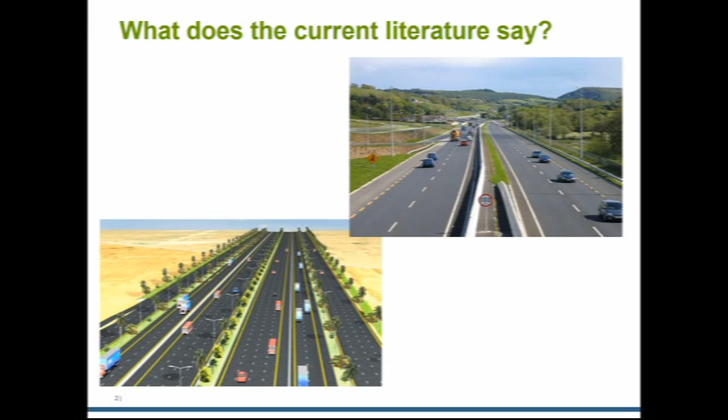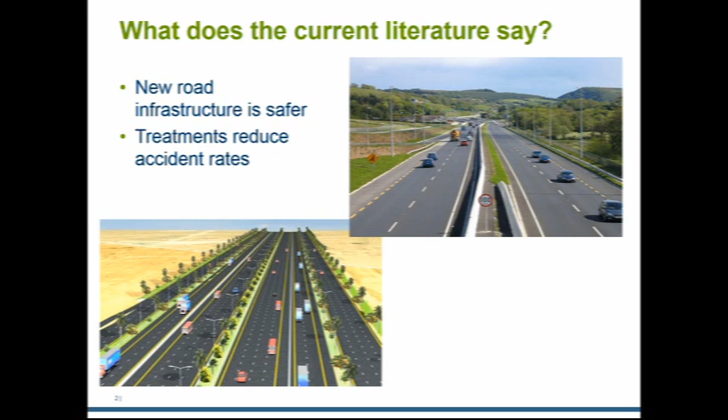So what does the current literature tell us about new infrastructure? So if it's a new road, it's going to be safer than an old road. And that's simply because they install treatments such as, they could have better alignment, you've got wider shoulders, or you could have barriers and so on. And if it's upgraded from 2 lanes to 4 lanes, then you've got dual carriageways, which will reduce the chances of head-on collisions.

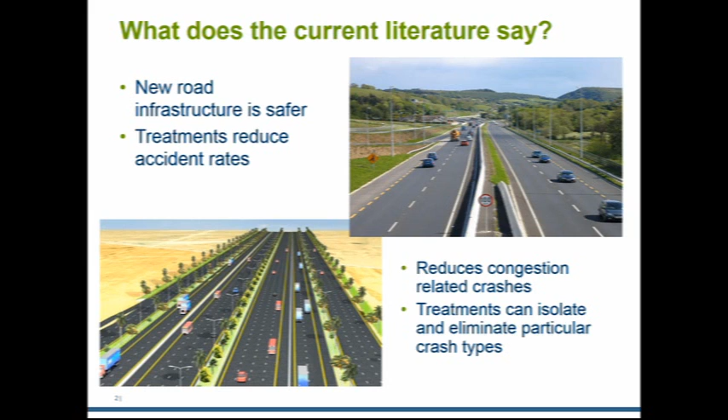Also as well, if there's congestion problems, you may have congestion-related crashes, which could involve potentially frustrated drivers and road rage. Also, start-stop, you're going to have rear-end accidents. And also new treatments in place can isolate particular accident types. So if there's one accident type that's very prominent, you can put in a treatment in place that deals with that particular accident, therefore making the road safer.

What existing literature also tells us is that new infrastructure improves operating speed. Again, with the extra capacity on that, vehicles don't have to travel at 30-40 kilometers per hour, for example, if you're getting congested. You could go back up to the speed limits of maybe 100 and 110 kilometers per hour. Literature also tells us that more fatalities occur at higher speeds. And if you look at the literature, that is actually quite obvious.

And if you look at the United States, reduction of speed limits has actually reduced fatal accidents by 16.4%. I think that was reduced from 70 miles per hour down to 50 miles per hour. Current literature was also generally focused more around the speed limits and how that affects safety rather than operating speed. And today's paper, we're going to be focusing a little bit more on operating speed than speed limits.

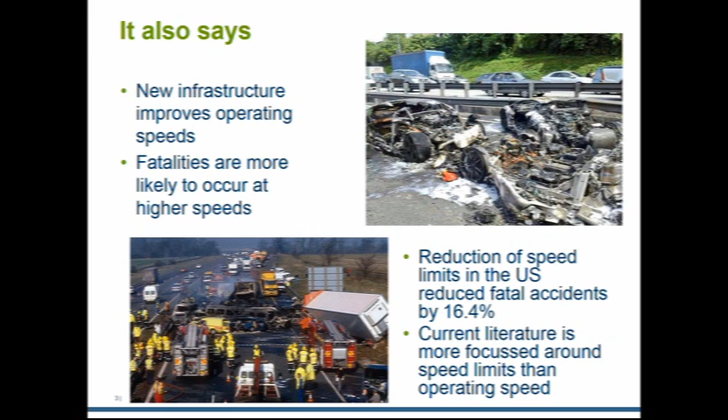So how are we going to establish a relationship between operating speed and safety? So what's been done is we've looked at particular sections of the Queensland network that offers us a range of speeds. And again, a lot of that is within southeast Queensland. So as you can see in the table here are the selected motorways and sections. Pacific Motorway all the way down to the border, got 79 kilometers there. Got the Bruce Highway, Brisbane to Maryborough, 225 kilometers.

Sunshine Motorway, again about another 8.6 kilometers there. Gold Coast Highway, Helensvale to Coolangatta, 29.8 kilometers. Gateway Arterial Road, 11.3 kilometers. Warrego Highway, Ipswich to Toowoomba, about another 95 kilometers. And the Western Arterial Road, Ellen Grove to Jindalee. So this was data that we've collected over about 2 or 3 years in order to have a large enough data set to establish a relationship between operating speed and fatal accidents.

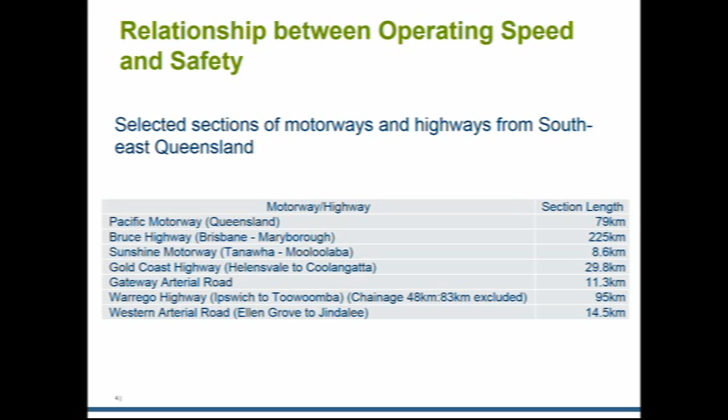So operating speeds weren't actually available in the data. They had again the speed limits, they had the capacity of the road, how many lanes in each section, and the traffic volumes, the daily traffic volumes. So in order to make a comparison between safety and operating speed, we had to calculate the operating speed based on the capacity of the road and the volume of traffic.

So you can see here the graph. This is a relationship between volume capacity ratio and operating speed for motorways. 4 lane, 6 lane, 8 lane uses this graph here. So volume capacity ratio of below 0.4, we would assume vehicles are traveling at the speed limit of 100 kilometers per hour. Between 0.4 and 1, we would calculate the speed somewhere between 70 and 100 kilometers per hour. And then for a volume capacity ratio of between 1 and 1.25, we'd calculate the speed to be between 30 and 70 kilometers per hour.

And then once we've got that average speed for each section, we'll then go and look at the number of accidents, how many fatal accidents, serious injury and property damage there is, and determine actually how safe those roads are for those particular speeds.

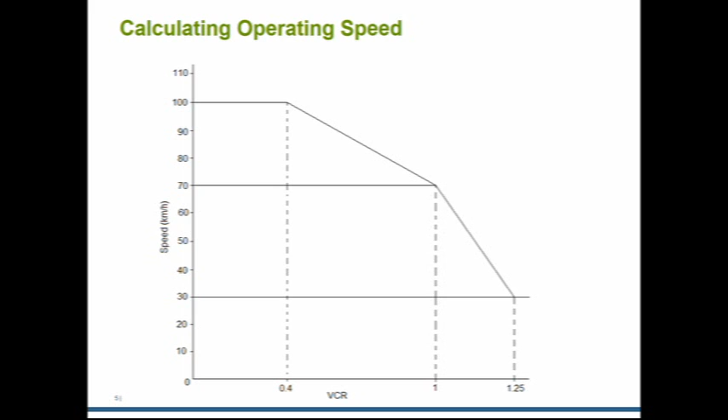So here are the results of the analysis that we conducted. So if we have a look at operating speeds below 70 kilometers per hour, we didn't actually collect any fatal accidents on those sections of roads, but more than half of the incidents actually were minor injuries, and we had about a quarter that were property damage. In fact, for that speed, that's the highest percentage out of all the speed categories we looked at for minor injuries.

If we look at 70 to 80 kilometers per hour, I think we would have had a few fatalities. Again, less than 1% of accidents were actually fatal accidents, and numbers were quite similar to what we're getting for less than 70 kilometers per hour. If we go up to 80 to 90 kilometers per hour, we see there's a bit of a jump now, actually getting more than 1% fatal accidents. And we're seeing that there's also an increase in the number of hospitalizations, whereas minor injuries percentage-wise are actually a little bit lower.

If we go from 90 kilometers per hour to 100 kilometers per hour, again, fatalities have gone up, now almost at 2%. Hospitalization, again, has gone up a little bit, and minor injuries are now down to just about 36% of all accidents. And once we get over 100 kilometers per hour, fatalities are actually up there almost at about 3.5%. Hospitalization has also increased. That's around, I think it was around 28 to

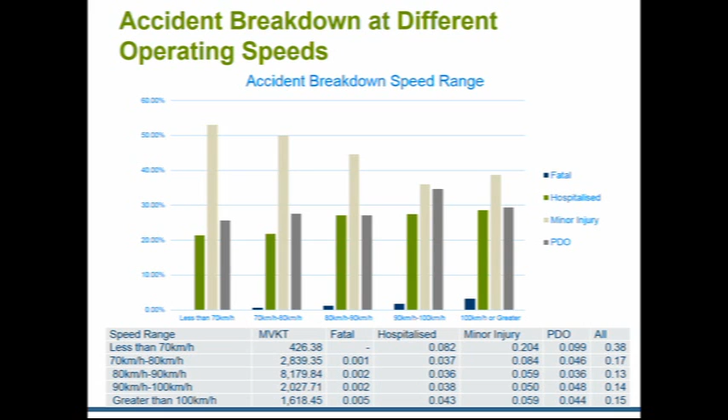29%. And minor injuries have remained fairly constant, and property damage, again, it seems to be fairly constant across all the speed groups. But it seems like there's a clear inclination for more fatal accidents to occur once speeds seem to get over 90 and especially over 100 kilometers per hour.

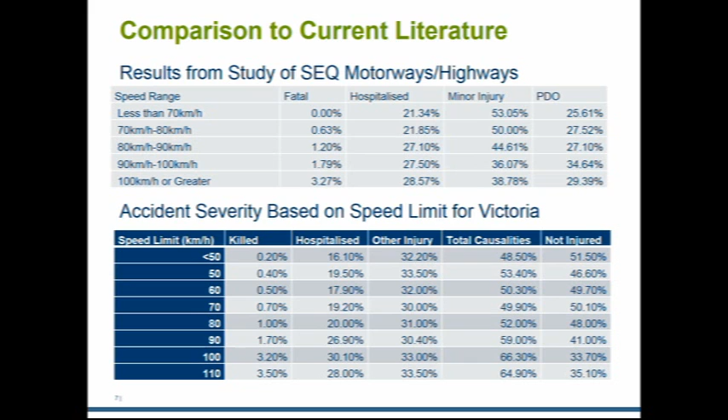So how do you put a value on safety? In transport, there seems to be basically two schools of thought. One is the human capital approach, and the other is the willingness to pay approach. Human capital approach basically looks at the cost of an injury or fatality in terms of income foregone, the cost it is to family in terms of disturbance of that nature, or you could be looking at hospital costs, costs and delays to the transport network of having to close a road down temporarily, and along those lines, something that you can put a dollar value on based on outcomes of certain events.

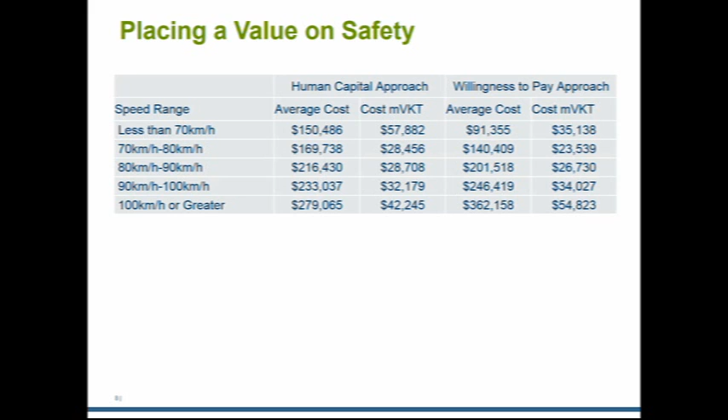The willingness to pay approach is a little bit more difficult, and there's a number of ways of going about that. You can use stated preference surveys. In a sense, you can be asking people how much value they put on their life, and that could be shown through a number of questions. Like, for example, would you take a more dangerous road that saves you 10 minutes compared to a road that's a lot safer? And you look at that in terms of their behavior to determine their approach to risk.

So where the two differ in terms of values is we've got the willingness to pay approach, which came at a statistical value of life of about 7.5 million in 2013 prices, whereas you've got the human capital approach, determined by Austroads, which is considerably lower at around $2.6 million per human life. The other types, hospitalization and minor injuries and stuff like that, the values came out to be quite similar. So it's really the loss of life being the biggest difference between these two approaches.

So we'll take a look at our speeds and what is the average cost based on the higher fatalities. So again, we've calculated it as an average based on the nature of accidents we showed previously. So using the human capital approach, the average cost is going to be about $150,000.

And if you're traveling at over 100 kilometers per hour, the average cost is going to be around $280,000. So it's almost double the amount. If we take a look at the willingness to pay approach, though, the cost of a crash below 70 kilometers per hour is under 100,000, so it's actually a little bit lower. But in terms of the cost of a crash above 100 kilometers per hour, because of the fatalities and because of the loss of life, that comes in at 362,000, which is almost 4 times the amount of the value of a crash that is under 70 kilometers per hour.

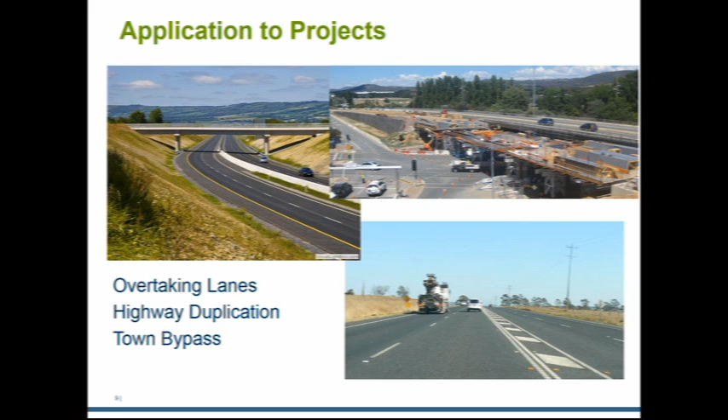Okay, let's start with the overtaking lane. So what does an overtaking lane do? So if we start off with 2 lanes, you add the overtaking lane, that's going to give us 3 lanes, and that allows for safe overtaking. So now vehicles don't have to overtake into oncoming traffic. It should improve operating speed, because again, there's going to be more opportunities to overtake. So vehicles will be moving faster and they should be moving safer.

So how do we actually calculate accidents with that? So a typical approach is we look at the actual section where the overtaking lane is. And Austroads has produced numbers such as 25% reduction in accidents for the length of the overtaking lane. So an overtaking lane could be 1 kilometer, for example. That 1 kilometer should experience 25% reduction in accidents. We look at also what we've got in an upstream area. So that's the 3 kilometers prior to the overtaking lane.

So what's been assumed here is that vehicles are going to be less likely to risk dangerous overtaking if they know there's an overtaking lane ahead where they can overtake safely. So again, you get that added safety. Again, it's only a 2.5% reduction. And then after the overtaking lane, there's been an assumed 2.5% reduction for that 5 kilometers. That's assuming that vehicles have overtaken the slower vehicles and they don't need to overtake another vehicle for a while. So again, it's making the assumption that you've got a stretch of road where overtaking isn't required, therefore it's going to be safer. And it's only a 2.5% reduction.

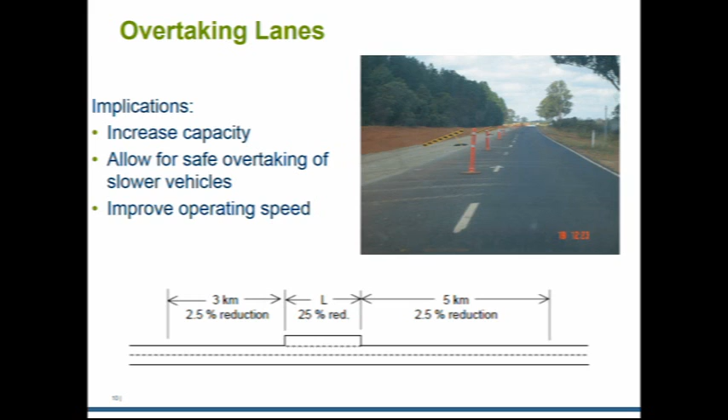So a number of key assumptions had to be made. So we made the assumption that the average speed improves from 70 kilometers per hour to 100 kilometers per hour. The number of vehicles, the average annual daily traffic, is 8,000. So we calculated it in our spreadsheet model, using the human capital values and also the willingness to pay values. So using the human capital approach, we came up with accident savings of just over 1 million, and using the willingness to pay approach, we came up with accident savings of around 480,000.

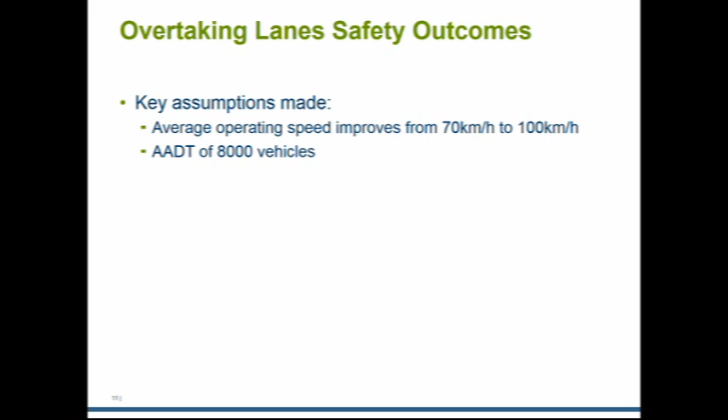So again, both results indicate that overtaking lanes are actually improving safety, even though operating speed has increased, simply because of those reductions in accident rate, because of the extra lane where vehicles won't have to overtake into oncoming traffic. Again, the willingness to pay approach gives you less benefit simply because of fatalities being so high and the higher speed potentially causing more fatalities than at the lower speed. But overall, the overtaking lane, even if you're going from 70 kilometers to 100 kilometers per hour, produces accident savings.

The next project we looked at was a highway duplication. So we went from 2 lanes to 4 lanes. So what is this? It's an increase in capacity. And by going to a dual carriageway instead of the single carriageway, there will be a reduction in head-on collisions. And of course, because of the increase in capacity, we'll see improved operating speeds.

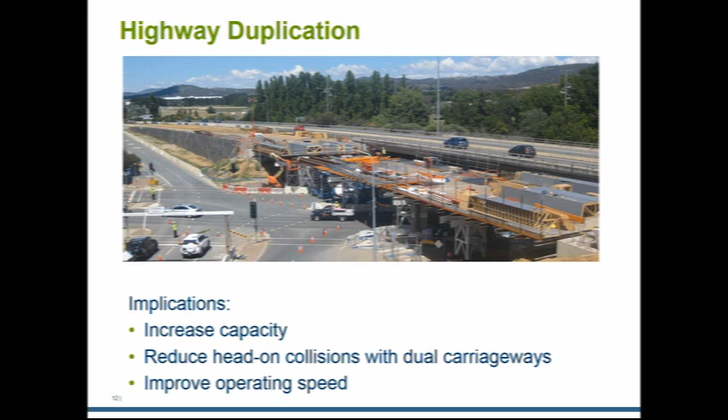So with the highway duplication, we made a number of assumptions. So we've assumed that the average annual daily traffic is 25,000 vehicles. Again, like with the overtaking lane, we've assumed that operating speed improves from 70 kilometers per hour to 100 kilometers per hour. So we've got a 2-lane average seal of 10 meters to a 4-lane dual carriageway. I had to state the seal width because, again, depending on the seal width, it has an impact on the accident rate. So this is a reasonably narrow seal compared to some of the wider 2-lane seals.

We're using accident cost reduction based on the model road state, as mentioned. So the results indicate, with the human capital approach, again, we have some savings, just under $1 million worth of accident savings. Again, that kind of makes sense in the sense that head-on collisions have been eliminated. The willingness to pay approach actually gives us negative savings, which is actually quite interesting.

So it appears that even though we've got a reduction in crashes from reduced head-on collisions, potentially fatal, because of the higher speeds, 100 kilometers per hour, there are actually still going to be more fatalities, and that high cost per fatality in the project case results in negative net accident cost savings.

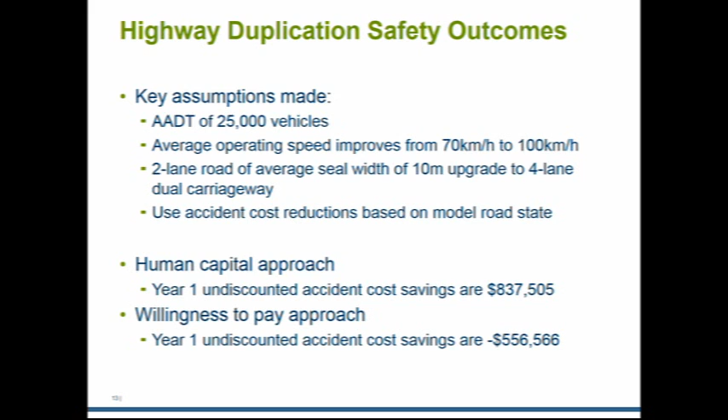Next project that we considered is a town bypass. So the new road is bypassing a small urban area. So what happens there is you're avoiding intersections within that urban area. So you're avoiding start-stop collisions and accidents, which normally intersections have a number of. Though normally there's not that many fatalities at intersections because of the lower speeds. And also now because we've got this bypass, you would expect to see quite an improvement in operating speed, in the sense that you don't have to go through a potentially congested urban area with intersections, etc.

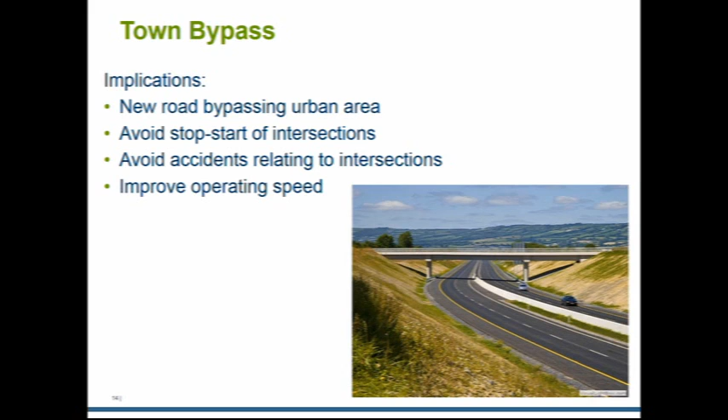So for this town bypass, a number of assumptions were made. So we've assumed that 3 intersections are bypassed, that there's an annual average daily traffic of 20,000 vehicles using the existing road. After the bypass is built, we've assumed that 10,000 vehicles now bypass the existing roads. So because we now got 2 roads, the average operating speed again improves from 70 kilometers per hour to 100 kilometers per hour, consistent with our other projects.

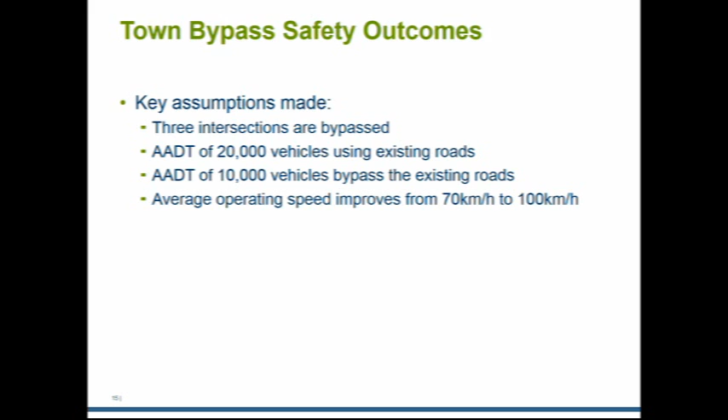So what do we get? A human capital approach again produces accident savings of almost $1 million, but the willingness to pay approach again produces negative accident savings. Again, it's the same thing. It's the higher speeds that are producing those extra fatal accidents, even though the number of accidents is probably greatly reduced. But those relating to intersections and stuff like that generally don't tend to be fatal.

But once a bypass has been built, moving at speeds of 100 kilometers per hour, based on our numbers that we showed earlier, is producing those high accident costs in the project case. So again, if we're using the willingness to pay approach, this project is actually causing a higher cost for accidents than if we hadn't gone ahead with the bypass.

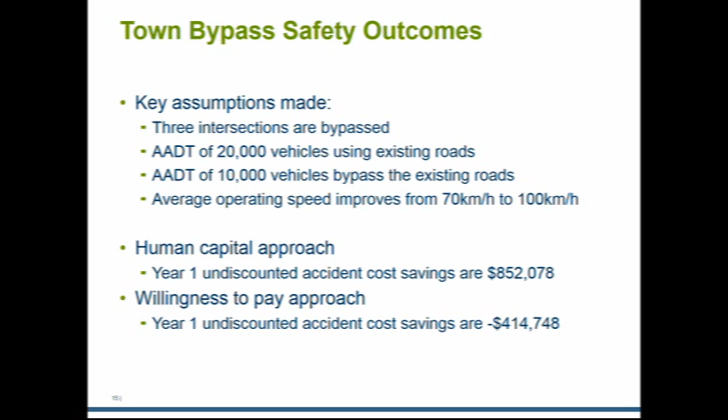The approach adopted here for the examples is a little bit different than the typical approach that's used in cost-benefit analysis. Typically, we'd look at an accident rate for your base and your project case, and then we'd use an average accident cost across the board, which includes all the accident types. So here we've actually looked at accident costs per accident type. So we've got the fatal accidents, which is higher, etc. So that's a recommended use, that we actually focus more on the different types of accidents that we get at different speeds, rather than just using a flat average.

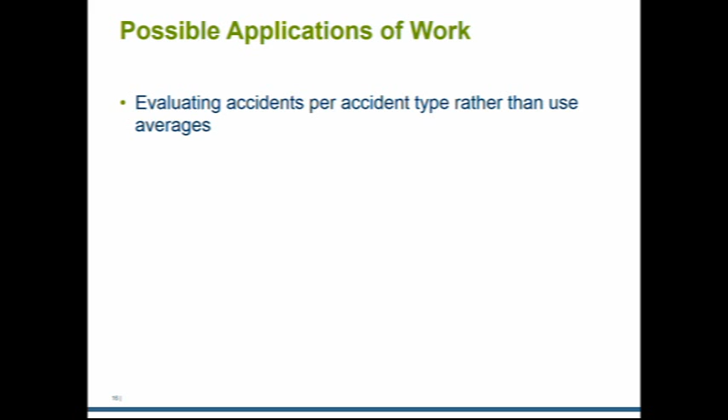What we've also found is what we're calling here the magic 90 kilometers per hour. It appears that once 90 kilometers per hour has been hit, roads become considerably more dangerous, in the sense that accidents above that speed are far more likely to be fatal, and that's consistent with what we've produced here, and also other literature, like in the US, where we went from 70 miles per hour down to 55 miles per hour.

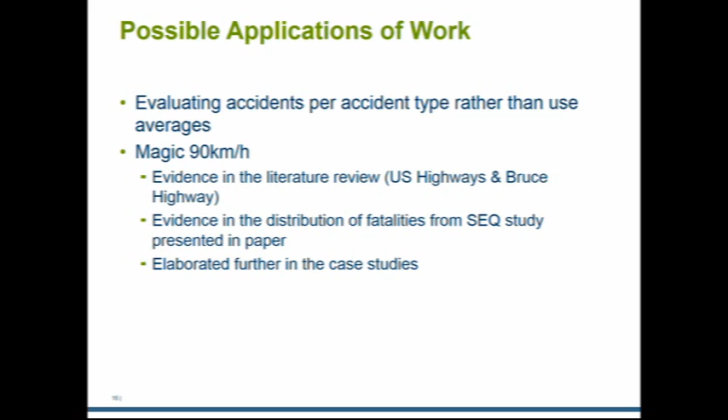Again, great reductions in fatalities. The Bruce Highway, it went down from, I think it was 100 down to 90 kilometers per hour. I think that was up to the Cooroy to Curra sections. Again, we noticed the same thing, a great reduction in the number of fatalities.

Another approach is to actually use DCA codes, or road user movements. And again, that is a far more detailed look at accidents. You're actually breaking it down for a particular type of accident. Is this a head-on collision, which has a much higher cost because there's a much higher chance of fatality than if it's a rear-end accident, which almost never produces fatal accidents, but you could have injuries and property damage. Again, that will give us a more detailed perspective when we're trying to evaluate accidents for a cost-benefit analysis.

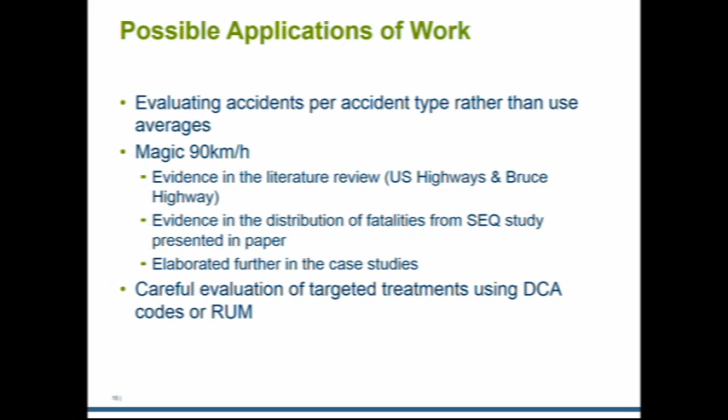So in conclusion, I'd just like to summarize the key findings of this paper. So we're looking at higher speed. Generally at a higher speed, you're more likely to have a fatal accident than if you're traveling at a much lower speed. But lower speeds that are caused through congestion will give you a higher accident rate, and you'll get more accidents relating to start-stop and things like that. So lower speeds, more accidents, but at higher speeds you're going to have more fatal accidents and potentially far more costly accidents.

And also, looking at the different types of projects, overtaking lanes, which generally deal with both safety and improving capacity and operating speed, both from a human capital and also the willingness to pay approach, give us positive accident savings, whereas some of the other projects that are very much focused on increasing capacity, such as bypasses and duplications, even though potentially they're designed to be safer, going from a single carriageway to a dual carriageway, if these operating speeds are significantly faster, you're going to have more fatal accidents, even if the road is generally reducing the number of accidents.

So again, that is something worth bearing in mind, and also in terms of designing some of these roads, you've got to cater for the chances of fatality. And also, it could imply maybe you should have a speed limit of 90 kilometers per hour instead of 100 or 110 kilometers per hour, given what our research is indicating, that it seems like anything below 90 kilometers per hour, the number of fatalities are kept fairly low. So if you're improving the speed from maybe 60 or 50 kilometers per hour up to 90 kilometers per hour, chances are the road is going to be safer than it would be if you were to then increase the speed to 100 and 110 kilometers per hour.

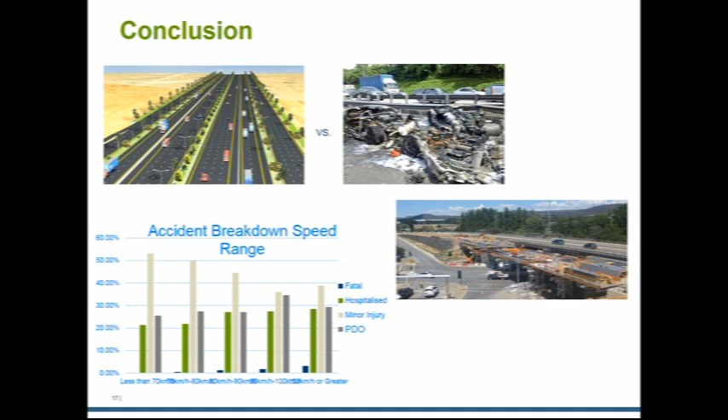Before I go, there's something I'd just like to leave you with. There was a safety campaign done by Transport and Main Roads, I think it was just a couple of years ago, and they would have these big flashing billboard signs saying, you know, you shouldn't speed, you should do this, you should do that, safety first, and all that sort of stuff. But the irony was that you're actually having these boards at the side of the road, potentially causing a distraction that could actually cause more accidents. Again, that is rather ironic, isn't it, for a safety campaign that potentially could be causing danger, given the fact that it's being advertised on billboards along roads, which could be causing a distraction.